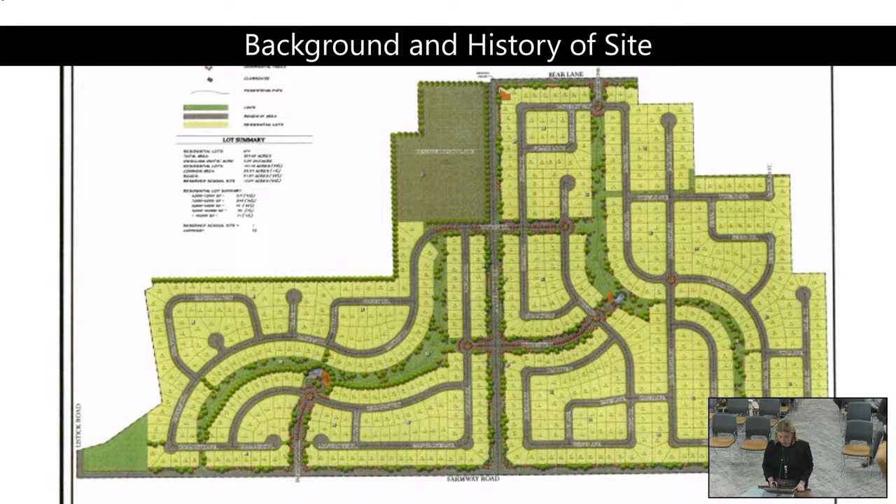The northern parcel, R3259401, was annexed into the city in 2007, ANN 15307, with the Zone C1 with an associated development agreement, DAO 714, and the comprehensive plan map amendment from low-density residential to commercial. This development agreement doesn't have anything that specifically restricts the parcel, allowing it to remain in place.

The applicant's proposing to keep the existing zone of R1 and C1 for this proposal. The proposed R1 zone is to provide areas by zoning procedures in accordance with the comprehensive plan that preserve and enhance single-family residential neighborhoods at single-family standard, consistent with the comprehensive plan. Such zones should have a full range of urban services available or projected to be established.

The purpose of the C1 neighborhood commercial zone is to provide areas by zoning procedures in accordance with the comprehensive plan that provide local commercial service needs located at select places at the perimeter of single-family residential neighborhoods, and in conjunction with the policies of the comprehensive plan.

The proposed development is surrounded by county land to the north and west, low-density residential to the south and northeast, and community commercial and low-density residential to the east. Staff finds the neighborhood commercial along the frontage of Ustick an appropriate zoning district, with low density to the south buffering the commercial from other single-family development and ag land.

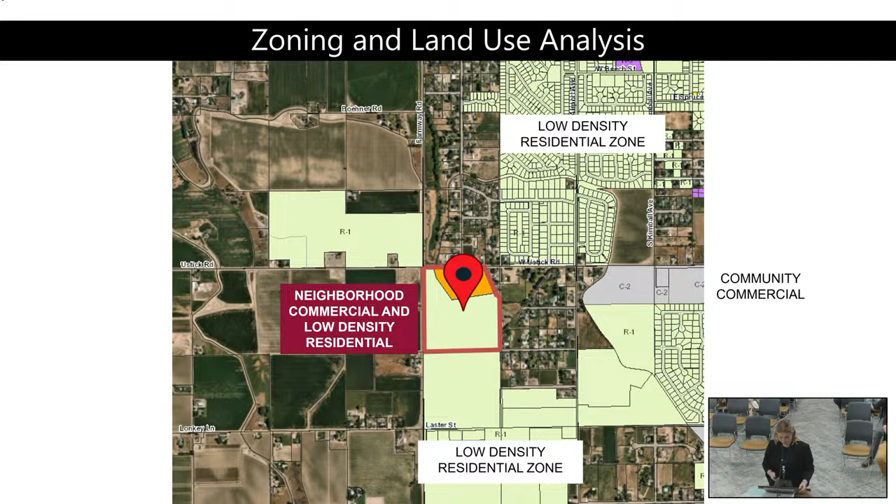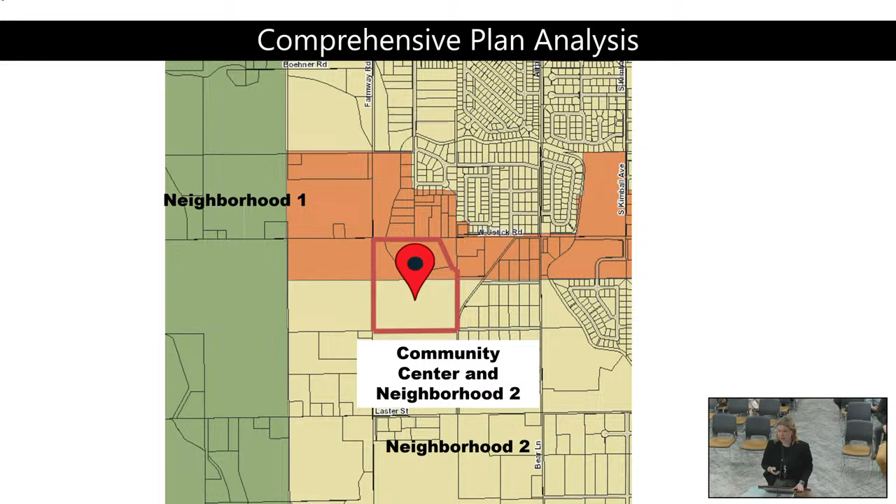The comp plan designation and developments, community center and neighborhood 2, is consistent with the intent for the comp plan, and the proposed densities are in compliance with the comprehensive plan. The proposed development is mixed use, consisting of 3.35 acres of commercial, 1.78 acres of townhomes, and 18.11 acres of single-family homes. The housing mix is 145 single-family homes total, with 121 detached and 24 townhomes. The proposed development project has been analyzed for compliance with city codes and policies, and staff finds it in compliance with all zoning and subdivision ordinances.

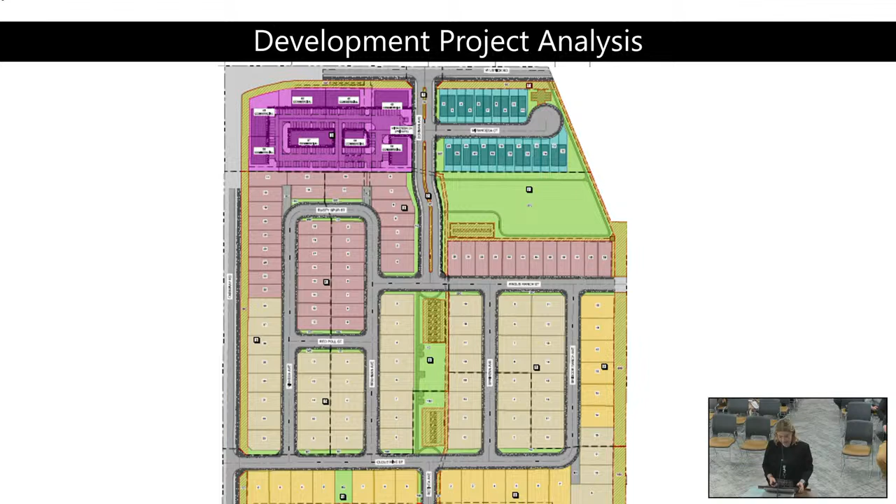Code section 100307 states the standards are allowed to be modified to better suit the project and the site. The applicant's proposing the following allowed deviations: a height increase to 35 feet within the R1 zone, a 5-foot internal side setback and minimum lot size of 4,932 square feet for single-family detached lots, a 0-foot internal side setback, minimum lot size of 3,190 square feet and 29-foot frontage for townhome lots, and the commercial use street side setback reduced to 15 feet.

The development agreement termination that's being proposed is supported by city staff, as each current property owner within the boundary of Aspen Falls Development Agreement was notified of the termination request. They provided the termination language and signature pages to sign if they wanted to show support, and several landowners within the DA area sent signature pages to the city in support of the termination.

The proposed development will have adequate site access, and all utilities are available or will be available as outlined in the engineering staff report. Public agencies were notified and asked to provide comments. The only agencies with concerns were Highway District Number 4, who had comments for council to consider, and Boise Project Board of Control, who requested the Pioneer Lateral be maintained and that they be involved in any decisions impacting the easement. This is not a concern at this time.

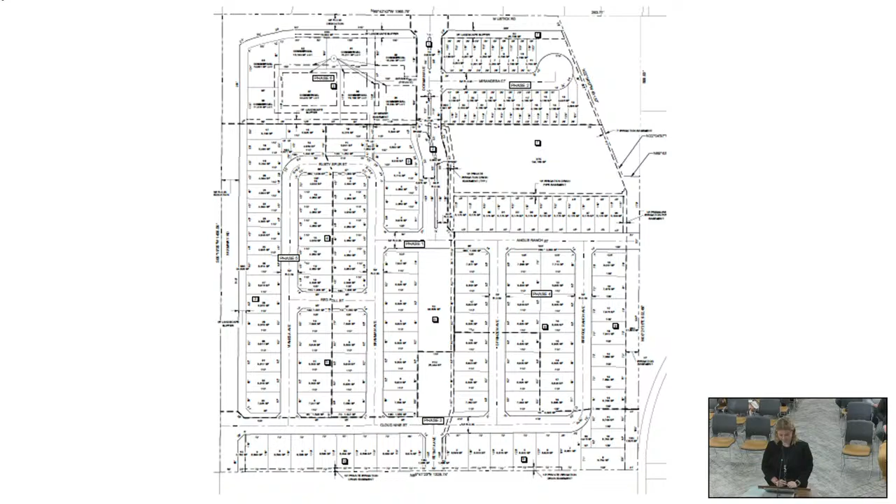I noticed that there were 7 different PUD requests for flexibility in the codes. Can you expand on why 7 different items within that needed to be flexed, so to speak?

Thank you, Mayor and Council. As you can see on this photo, the portion in yellow is the area zoned C1. Some of these townhomes fall under that portion, while the bigger lots to the west are the commercial portions, so they're having to flex some of the restrictions for that area specifically. The townhomes are the ones up in pink on the eastern corner, in the commercial zoned area, so some of those are having to request waivers that wouldn't necessarily be met typically.

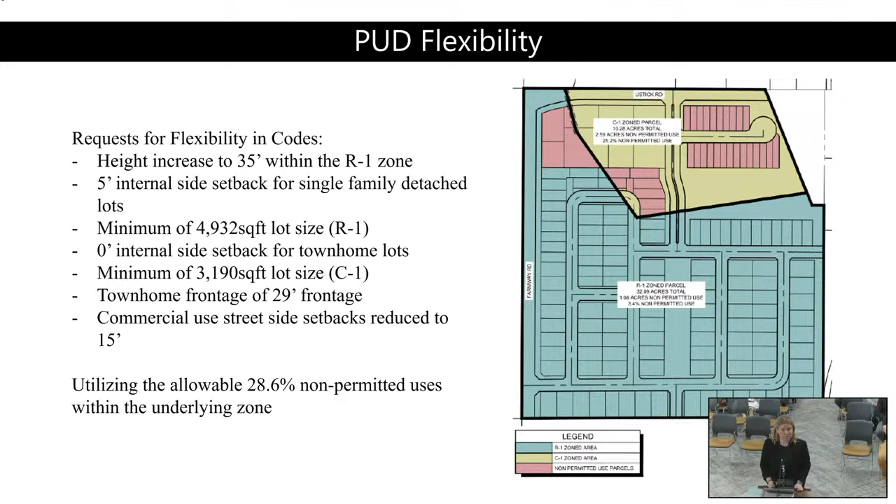All right, thank you. Any other questions at this time? Okay, excellent, thank you so much. Appreciate that. Mr. Mayor, yes, just one last question.

Do we know why it was rejected to begin with? Mayor and Council, this project specifically is brand new to this area. It was Aspen Falls, which was larger. Based on what I read through the minutes, they didn't believe it fit the area, and that development would not be in conformance with our comp plan currently today either. Okay, thank you so much.

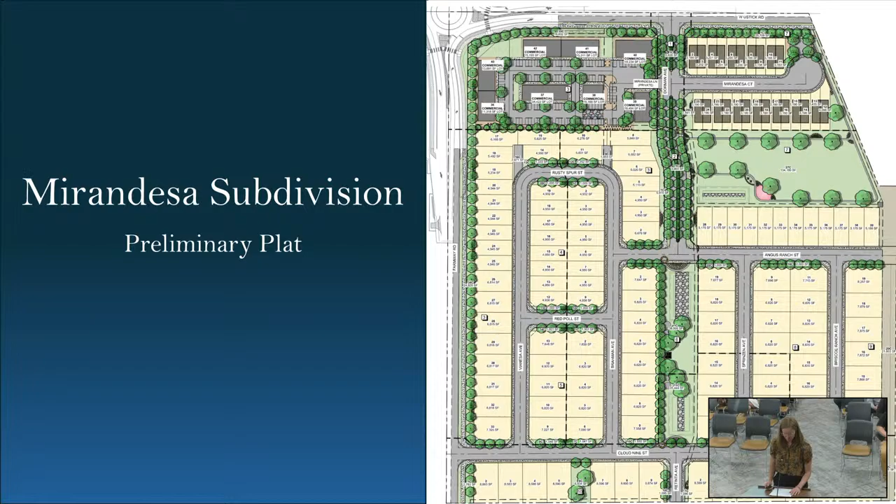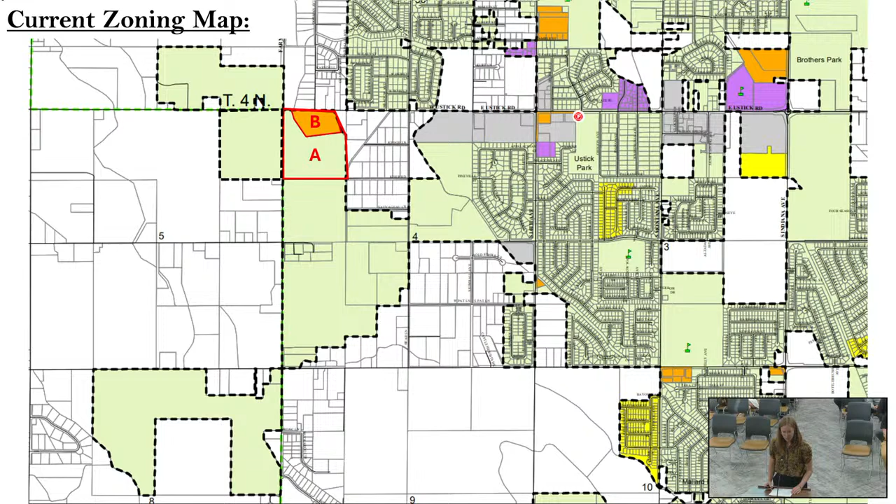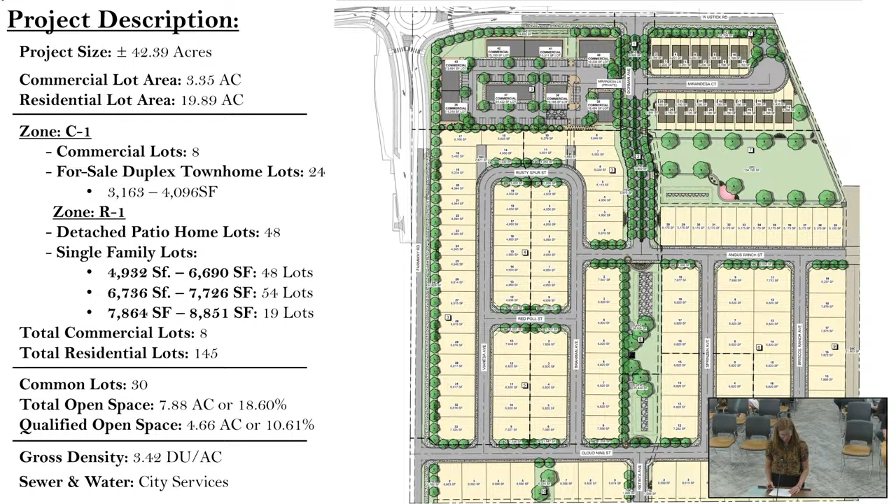The project consists of 2 parcels which have been annexed into the city of Caldwell since 2006. Parcel A has a zoning designation of R1, parcel B having a zoning designation of C1 neighborhood commercial. Mirandesa is a mixed-use development on 42.39 acres. This development will consist of 8 commercial lots, 24 individually platted for-sale townhomes, 48 detached patio homes, and 73 single-family lots ranging in a couple different sizes.

The comprehensive plan and future land use map designate this area as business and low-density residential, allowing a mix of 6 units per acre with a PUD. Mirandesa will abide by the business and low-density designations and is proposing a gross density of only 3.42 dwelling units per acre, which is half the allowed max of the PUD.

I now want to discuss the nuts and bolts of the project. As I mentioned earlier, we're going to move the commercial to the hard corner of Farmway and Ustick, proposing 8 commercial lots with 144 parking stalls, 2 EV stalls, and 24 bike parking stalls. This area will take access off the proposed Dorman Ave, then to Ustick. These commercial lots will not have direct access onto Ustick or Farmway.

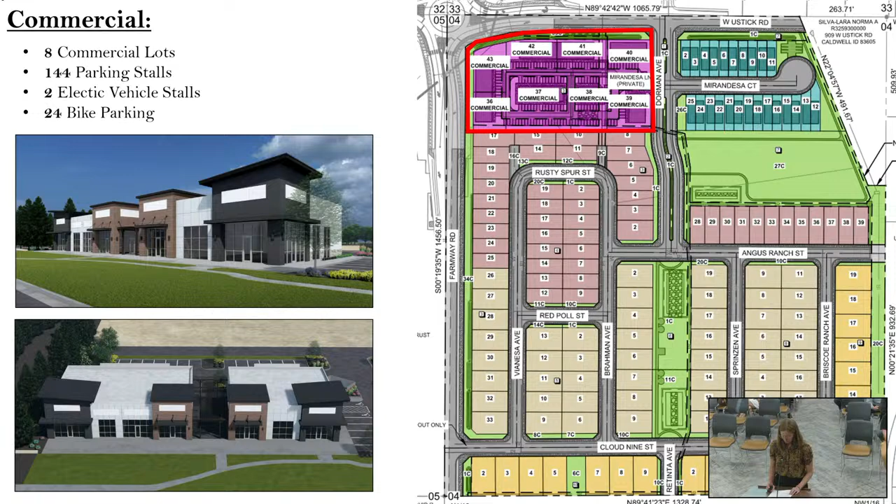On the other side of the commercial, we're proposing 24 individually platted for-sale duplex townhome lots, ranging from 3,163 square feet to 4,096 square feet. These townhomes will have a 2-car garage and driveway. We're also offering a 6-stall parking lot to accommodate guest parking there.

Just south of the commercial and townhomes, we are proposing 48 detached patio homes with lots ranging from 4,932 square feet to 6,690 square feet. These homes will also have a standard 2-car garage and driveway.

Then just south of the patio homes, highlighted in red, will have 54 single-family homes with lot sizes of 6,736 square feet to 7,726 square feet.

And lastly, as we move away from Farmway and Ustick intersection, we are proposing 19 single-family homes with lots ranging from 7,864 square feet to 8,851 square feet. These homes will also have a standard 2-car garage and driveway.

So Mirandesa will be fully developed in 6 phases with an estimated 12-year build-out.

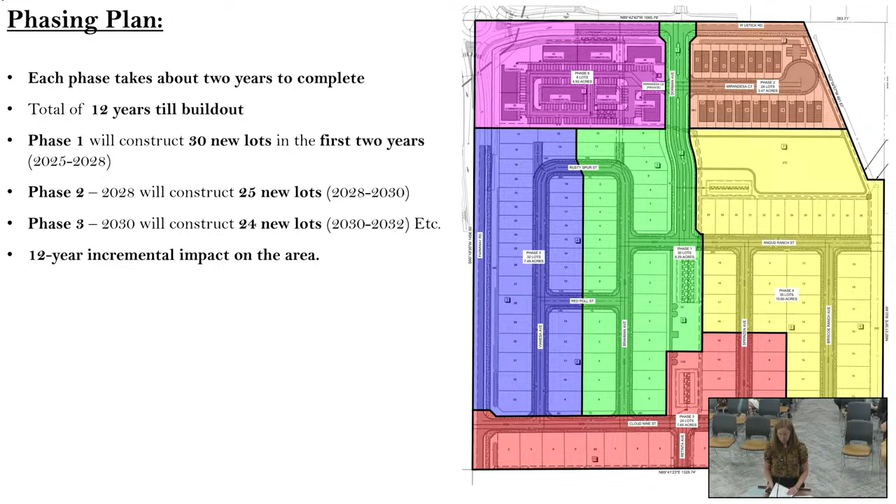Additionally, there's a 41-foot irrigation easement on the east side of the property that provides a large buffer between our project and the neighbors to the east. We're also going to try and retain the existing trees in the irrigation easement.

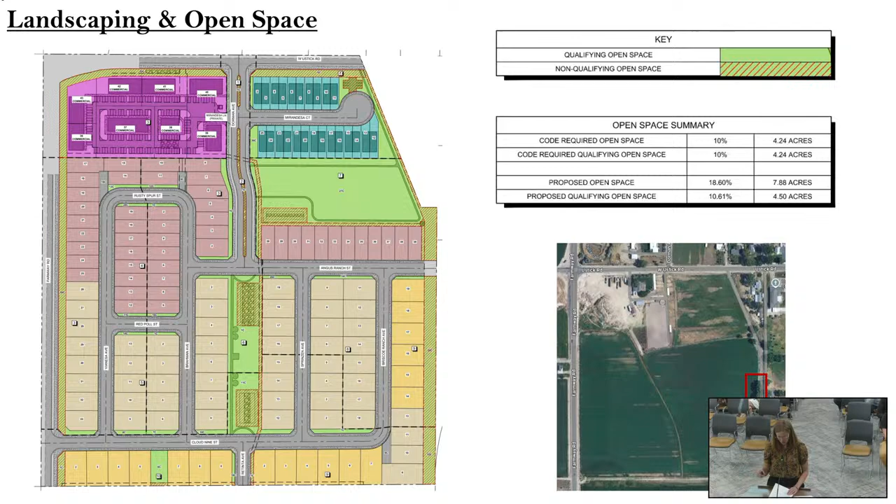The landscaping for this development will feature a mix of trees, shrubs, and various other plant materials to create a welcoming environment. Residents will enjoy a wide range of amenities including an outdoor fitness area, playgrounds, and picnic areas with barbecues. Additionally, the development will include a 10-foot pathway along Ustick and Farmway, and then 5-foot micro paths on the interior.

This development plans to construct 11 new local roads. Ustick will have a right in, right out with left-in only. Farmway will be right in, right out, and all local streets will have curb, gutter, and an attached sidewalk. Ustick and Farmway will have a 10-foot detached sidewalk and a 25-foot landscape buffer.

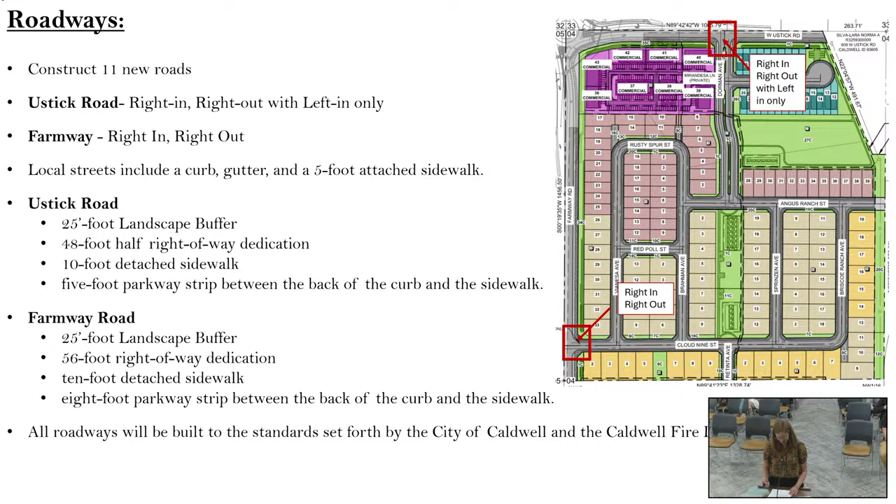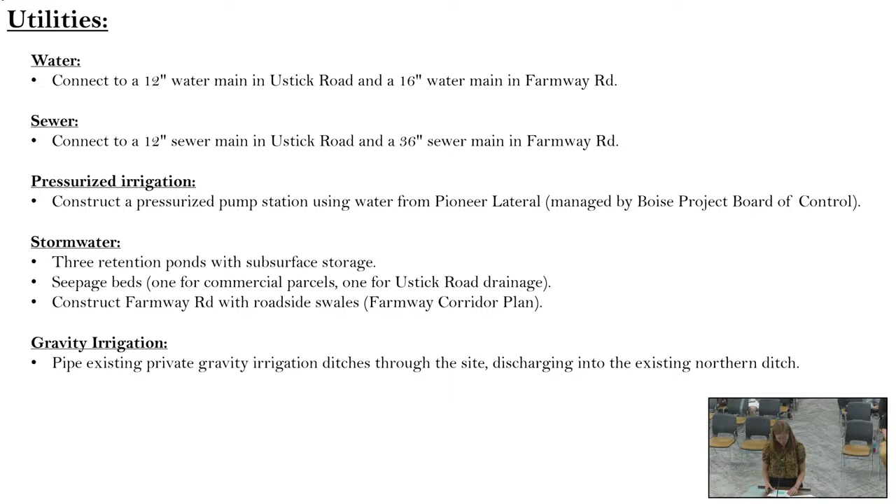This development will connect to a 12-inch water main in Ustick and a 16-inch main in Farmway. For sewer, we'll connect to a 12-inch sewer main in Ustick and a 36-inch main in Farmway. We plan on constructing a pressurized pump station using the water from the Pioneer Lateral, and all stormwater will be retained on site.

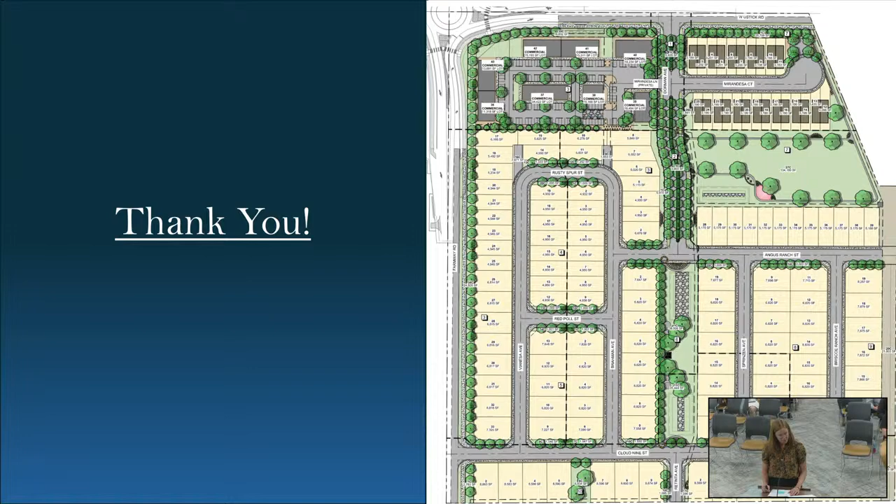So as I wrap up tonight, I just want to request that we have an open dialogue about this project before we close public testimony. I would love to hear your feedback and address any concerns you guys might have. Thanks.

Councilor Doty: Just one question - was it discussed what phase, if approved, your open land and all your amenities would be within? Lately we've been asking what phase that will occur, so it doesn't happen 6 to 8, 10 years from now, so that some of the first folks in there can use those amenities. Was that covered in this particular project?

So yeah, that's looking like - I'd have to get my plat. Can I run up and get my plat? What was that? Can I run back and get my plat? Mr. Mayor, staff can remember too. Either way. Or Katie, do you have that?

Mayor and council, on here it shows phase 4 for the large portion of open space. Perfect, thank you. Other questions from council?

Councilor Allgood: Becky, you've requested a 35-foot height variance. What portion of this project is going to qualify for that 35-foot height variance?

Yeah, so the 35-foot height variance - it's really hard to build a quality style two-story home with just 25 feet. Most homes that you build these days are over 25 feet. Those that aren't don't really have the architectural designs that differentiate between standard cookie-cutter houses and the higher-end homes. The homes that we tend to build are going to be higher-end homes, so the roof line won't necessarily be 35 feet, but the architectural elements might be.

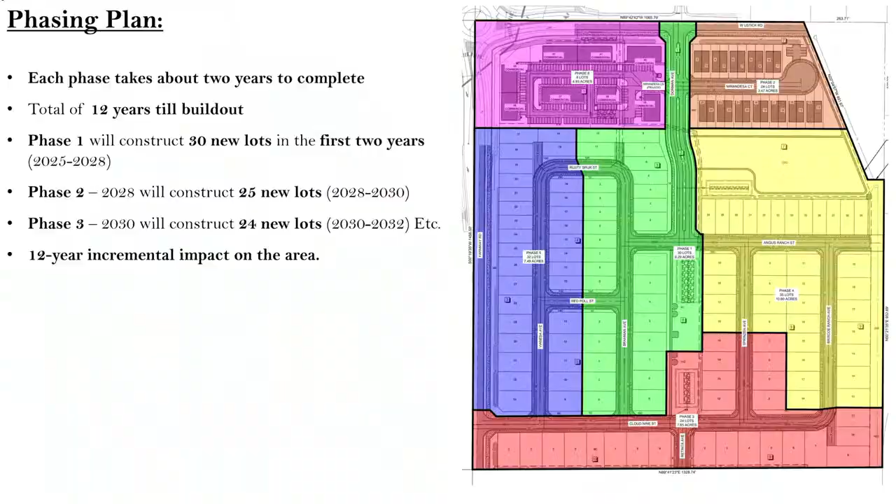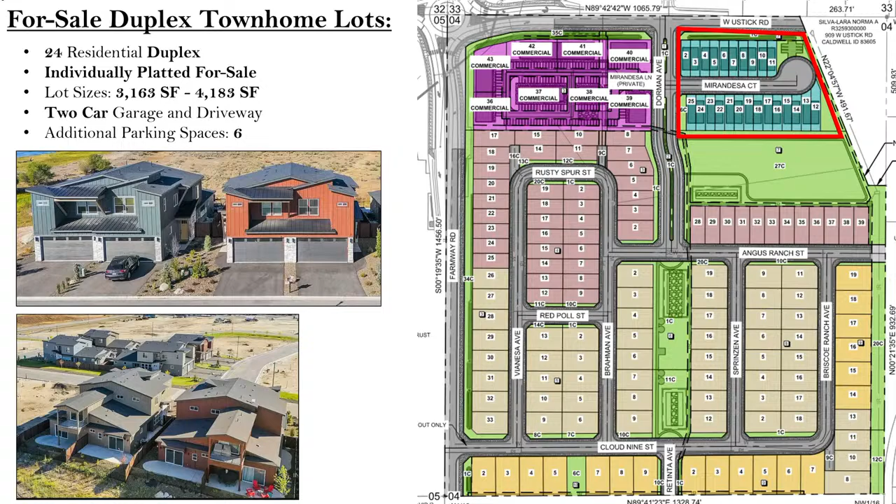Follow up? I just want to be specific. I understand the townhomes would be taller. Are you saying also individual family homes would be over the 25 feet, scattered out throughout this project? I can bring up our builder, and he can discuss that a little bit more, if that works for you, on the specifics. We'll probably just go through questions with you, and then he can come forward afterwards and touch on anything that's not covered.

Any other questions for Becky this time? I thought I might have had one, but I think you probably answered it. So maybe just, within the open space, is there any plan for additional amenities that'll be located inside of those areas?

Yeah, so we're planning an outdoor fitness area, one of those outdoor fitness gyms, like circuit gyms, and we're also planning barbecue areas with little picnic spots, and obviously we're going to have pathways throughout the development. Let me see if... what's that landscape plan? So you can kind of see, I guess it's not really depicted in there as well, but you can see in that southwest area, that's kind of where we plan on having the amenities. That pinkish area is going to be where the playground is.

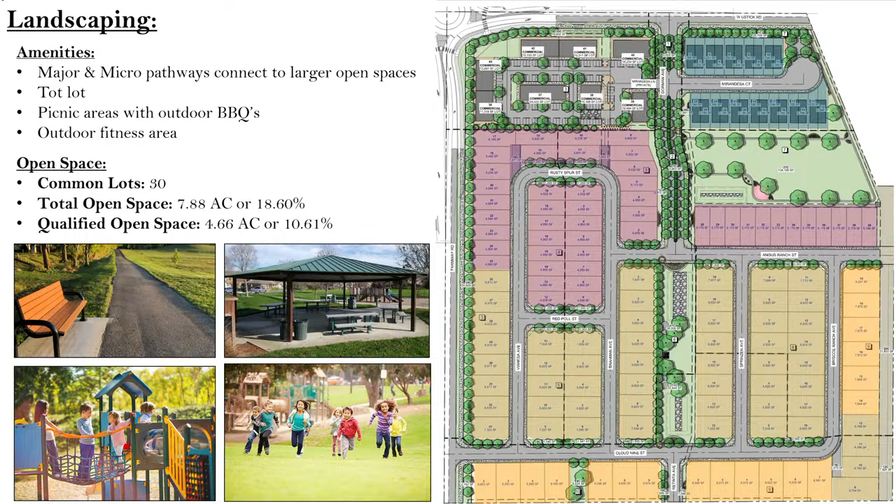Okay perfect, thank you so much. Appreciate it, thanks. So I'm guessing Dean is the builder, so it sounds like he gets to come up even though he said no. So Dean is signed up in favor. But anyway, do you mind just giving your name and address, and then maybe touch on it?

Dean Waite, 2154 Timber Trail, that's in Kuna, Idaho. And I am in favor of this project. To answer your question, yes, we would think that those 35-foot exceptions would be mixed throughout the subdivision. The new R1 code does allow for 35 feet. I think because our application came in with the old code, we're asking for that exception so that we can be brought up to the current standard of R1. R1 does allow for 35 feet in your new code, but we're being approved under the old code.

Okay, very good. Any follow-up on that? Any other questions? Okay, thank you so much. Appreciate that. So that moves us into - there's nobody signed up in neutral.

So we do have a few people signed up in opposition. First is Conrad Wood. If you'd please come forward and state your name and address, you'll have 3 minutes for your testimony, and then stand for questions after that.

Conrad Wood, 705 Kaiser Lane. I'm here representing the Orchard Heights subdivision, which is directly east of where this is going. Could I get the plot map put back up there, please?

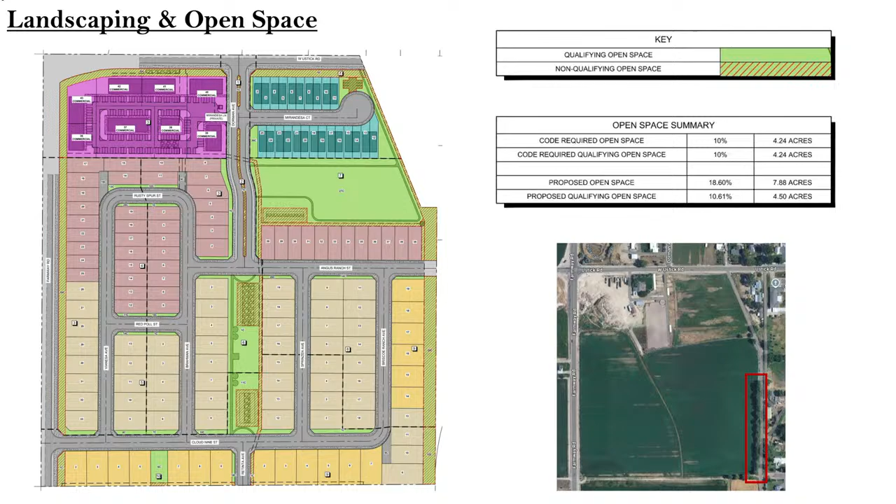So let me kind of go back here. So we're going to have 24 residential duplexes, and those will be for sale, individually platted. And then kind of to the south of that, we're going to have patio homes - those are going to be single-family detached homes, for sale. And then just south of that, we're going to have the traditional single-family lots with the 2-car garage and driveway. And then just south of that, we're going to have another single-family home product.

Mayor, can I ask a question, Becky? So when you said they're duplexes, are they actually duplexes, 2 units on a single plat, or are they townhomes connected by a common wall? They're connected by a common wall. Okay, so they're single-family townhomes, not duplexes. Yeah, thank you, I saw the line going through there. I was wondering that same thing as well. Okay, thank you for that clarification. Thank you for that question.

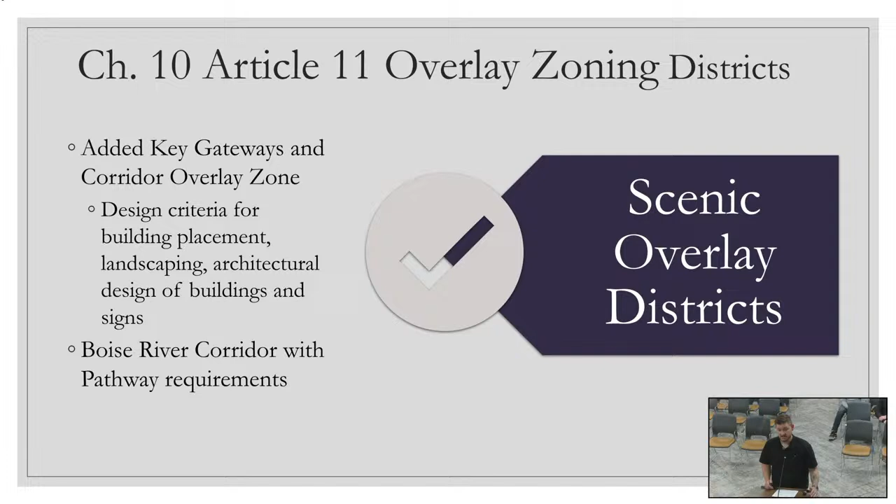We also included the Boise River corridor and pathway requirements for that. That was something very new that wasn't called out before, and it was something in the comp plan that a lot of residents had noted as being something they wanted added. So now that will be part of the overall pathway requirement.

Within the special development and urban design overlay, this includes the downtown area and the transitional neighborhood area, so your core and then that next rung outside of that. It also includes the area between the river and Centennial, and the river and Simplot. Again, that's that Boise River area, corridor two.

All overlay zones will have, and do have within this code, additional prohibitions on land uses within these overlays. We've had a number of property owners come and discuss this with us, initially upset, frankly, saying that we ruined their life, et cetera. After speaking with staff and with the director, we've talked all of them off the ledge, from my understanding, and we've helped them understand what these overlays mean, what new potentials exist for the properties, et cetera. At least the ones I've discussed this with, there's been some good feedback, and they understand why these decisions are being made.

Any questions on the overlay districts?

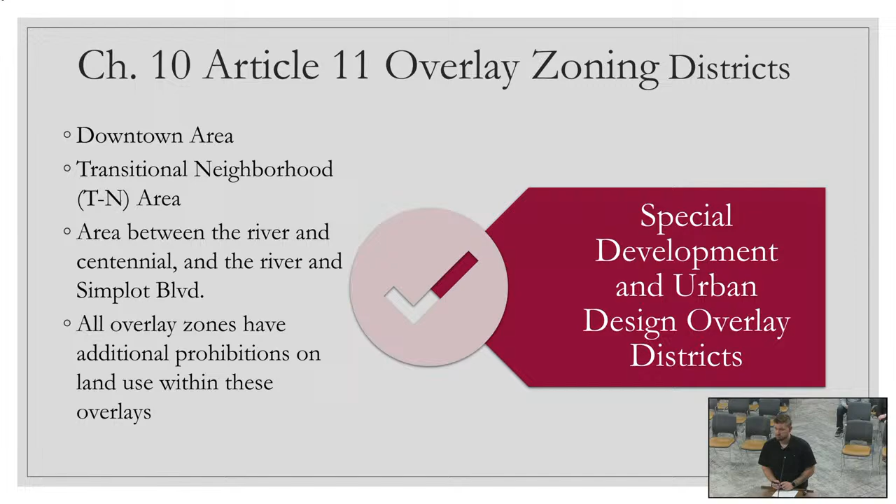Councilor Dittenberg: So one of my very first meetings with Robin, even though it got off to a rough start, was about housing overlays, right? Taking a look at certain areas of the city and asking how do we develop this in housing, and is there room in the ordinance if we wanted to implement a housing overlay, or some sort of overlay that took a priority look on a certain area just for housing? Could that be accommodated in our code?

Councilor Dittenberg, Mayor, Council: yes, it can. Nothing in the code would prohibit that from being a future amendment. Yes, sir.

Okay, moving to Article 12, which I believe is the current downtown section. Now moving that to the other sections that we noted opens up a whole new layer of possibilities, which is specific use provisions. So these are uses that are typically going to be permitted within the land use schedule, no matter what district they may be in.

But these are additional standards on top of base standards that would be required. This is something that allows us to regulate things more in depth and more specifically without having to do a public hearing that just slows everything down.

So these would include adult businesses, automotive uses, drone delivery, modular buildings, mobile food unit parks—not just the individual units, but if you want to do more than one—shooting ranges, establishments serving liquor or beer, all of those types of things. There's a number of them that are new. There's also some that are existing that are only regulated currently in the downtown code section, but we've broadened that to now include regulations across the board wherever they are.

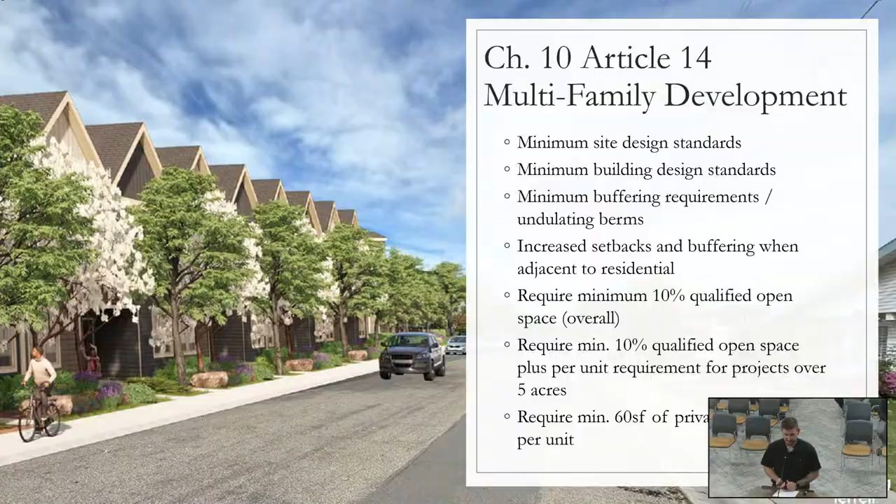As far as the design criteria, this is an example we've used before showing different accent materials, different roof profiles, landscaping and berms in the front with different ground cover, as well as an increased number of trees, a slightly further setback, different materials even on the face of the elevation showing a bottom, middle, top kind of thing, having accent materials and accent colors, even thoughtful lighting as an example.

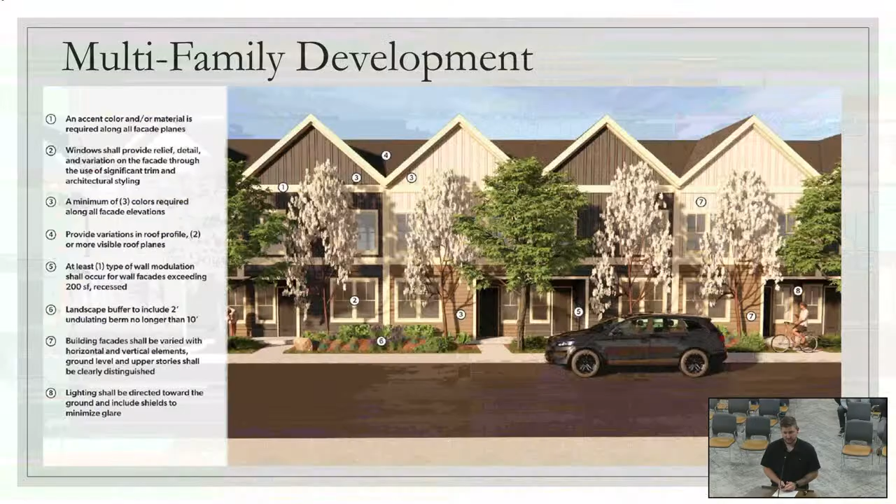Those are all things highlighted within those minimum design standards in this article. With that, I will stand for any questions, as well as Director Collins is here too, for individual sections of the whole shebang.